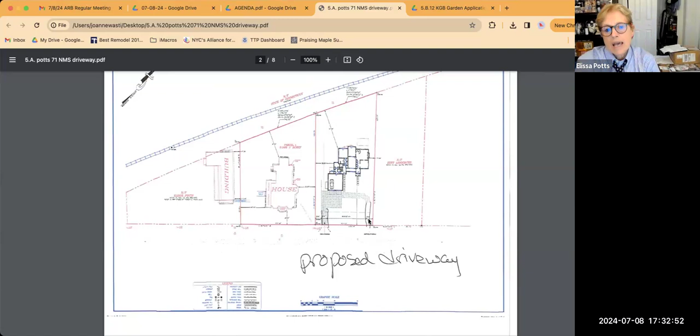Right where it says proposed driveway, on the right-hand side of the house is the present driveway. Right now it would pull in and stop in front of the garage. With all the guys who have been working and seeing how they had to cut a second driveway in on the south side of the property, it just made logical sense to make it a semicircle driveway. The guy doing the work, Justin Moore from Chippewa, said it would make so much sense to just make it a semicircle driveway.

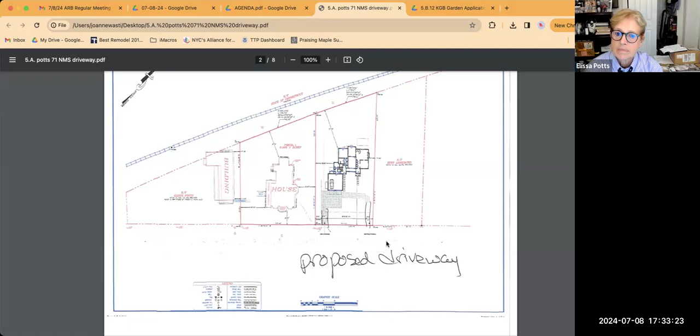So I reached out to DOT and spoke with him and asked what he thought. He said, to be honest, that actually makes perfect sense—he knows the property, he knows Kent—because this way trucks won't have to back out onto Route 7, they can just continue around the circle. Then I spoke with Ricky Osborne at Town Hall and he didn't seem to have a problem with it at all. So I spoke to Ty and she said put together the drawings to show them what you want, and this is what we're doing.

So obviously we're going to make sure we're aware of the sight lines from the south side of the property, so it's all legal, but this would reduce the size of the berm. It's not in height—it'll still stay 3 feet—but this way you'd have a horseshoe driveway going in front of the house.

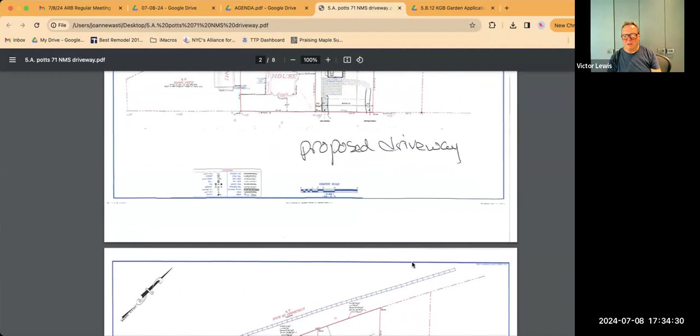Yeah, Elissa, just staying on that one for a minute—do you want me to go to the proposed? Is this... that's present. I'm sorry, go back to the proposed. Okay, just from experience, I'd encourage you to round this off because people will be driving over any landscaping or grass you put there. Oh, it's going to be rounded out for sure.

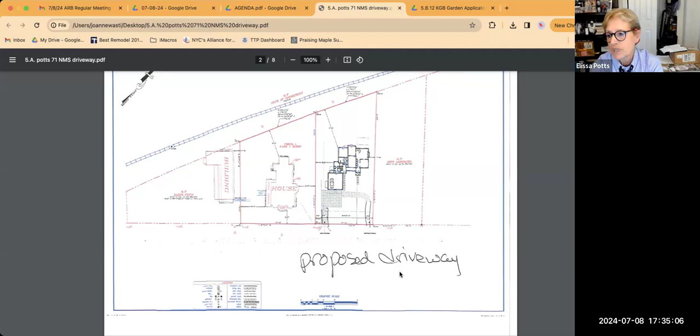Scott, what happened is I needed a quick drawing, so Scott Samuelson, the architect, drew this kind of quickly. He didn't exactly know what—I just needed something tangible to bring to zoning, but yes, it's going to be curved. That's all, looks great.

Yeah, I can show just the other—we know where it is, I believe. Here's a picture of the present, where you see the taller pile of dirt on the south side of the property is where that cut is right now. During construction they were using it to bring the dumpster in and out and to bring material to the back of the house. So all of a sudden the driveway was there and I thought, that would be great. Everybody said, why don't you see if you can get a permit to make it a semicircle driveway? So that's what we're aiming for.

Yeah, I mean, it makes sense to me. I think there's also that part, yeah. And obviously the town—DOT will have to put a curb cut in it and stuff like that, but he's totally fine with it. He said that makes—I mean, I reached out to him first and he said that would be so easy for you to do. So there you are.

Jonathan, I don't know if you have anything to add? No, looks good to me. All right, I'll make a motion to approve as is for a circular driveway.

Second. All those in favor, say aye. Aye. Okay, thank you, looks good to all.

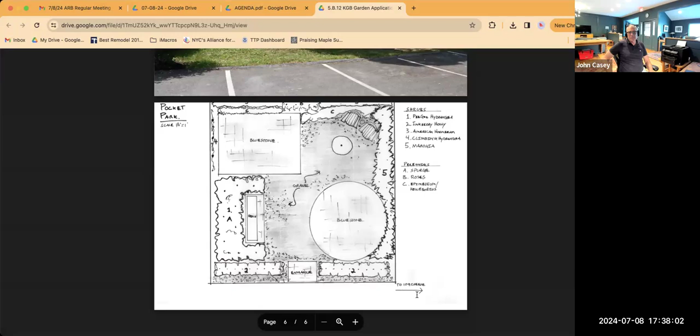So anyway, we're gonna make this a park, kind of like a pocket park. And you have the planting list on the side there too. I love this idea. I like that it's called a pocket park too.

There are a few limbs that need to be removed. And Russell Plum is really a master tree guy, and so he's gonna fix that. It's gonna be the first thing that we do. He's giving us guidance on how close to the roots of the tree we can safely go without compromising the root system of the maple.

Right, okay. Yeah, I think all those are native plants that have been specified. What's your timing?

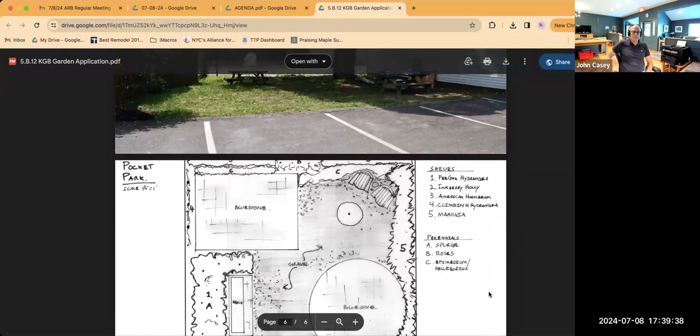Late summer, maybe early fall, because I don't know, we might do some of the hardscape sooner than later and then wait until it cools off a little bit to plant, maybe in October.

Sounds good. And you're doing gravel in here? I see you have the bluestone little patios, right? Yes. And then why gravel rather than something else? Well, I think it's a maintenance issue as much as anything. It wasn't my idea, it was specified by Curry Gardner, who's an architect and a master gardener, and he thought that would be a good way to keep the weeds out.

Go up a photo, Joanne, please. I was just curious how the parking would hit it. There would be a walkway to be able to go between the cars. Well, it looks like the entrance on the drawing is in the middle there.

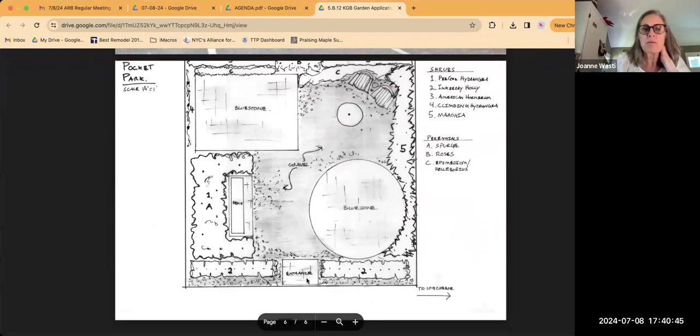So I guess, I'm not quite sure how we're gonna handle that, to tell you the truth. We have plenty of parking, but I'm a little bit reticent to ever remove a parking space. We have 7 per 1,000 here, so we're fortunate, but I could still meet the parking requirements for P and Z by removing one space. We may end up doing that.

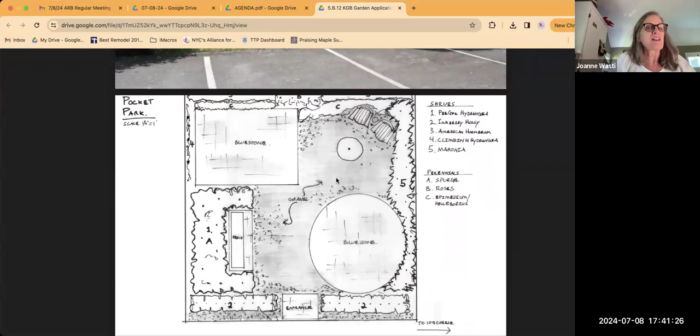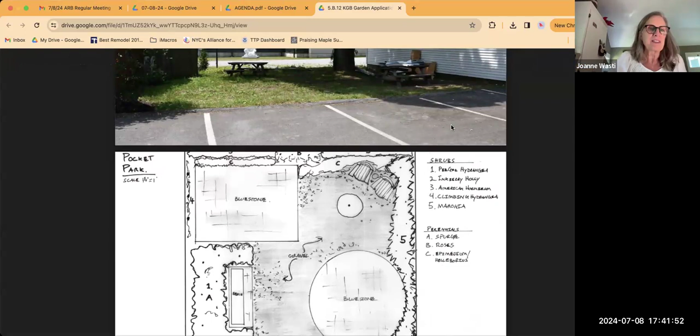Yeah, I mean, it would be nice to have an obvious pathway as you're coming down the street. Yeah, so somehow creating some kind of pathway back there. I know most people don't really walk to that area, like IGA, I do, just because I happen to be close, but yeah, it would be nice to think about just footpaths somehow through there. Yeah, I agree with you.

I mean, I was thinking about this the other day, it's like everybody comes up and down Main Street because there's pathways and they go back to the barns because there's a walkway and there's sidewalks, but we don't have any sidewalks here.

Has that ever been considered, putting in sidewalks or a walking path in front of the shops so people don't have to walk in the street to visit these? We don't have the width to do that. In order to re-engineer the parking, we'd have to maintain a 24-foot roadway. And if we do that, we have several areas where it's too narrow to maintain a 24-foot bilateral parkway, passageway, and to put in sidewalks.

It would make the parking spaces too short. Got it. Interesting. Well, it looks good. It'll definitely add value to the space. It's certainly a lot better than it was, or will be. Yeah, no, I love the idea of just having like a little park there.

Is there any lighting considered or no? You know, usually the way I do things is kind of get the basics in and then improve on those as the situation allows me to. Okay.